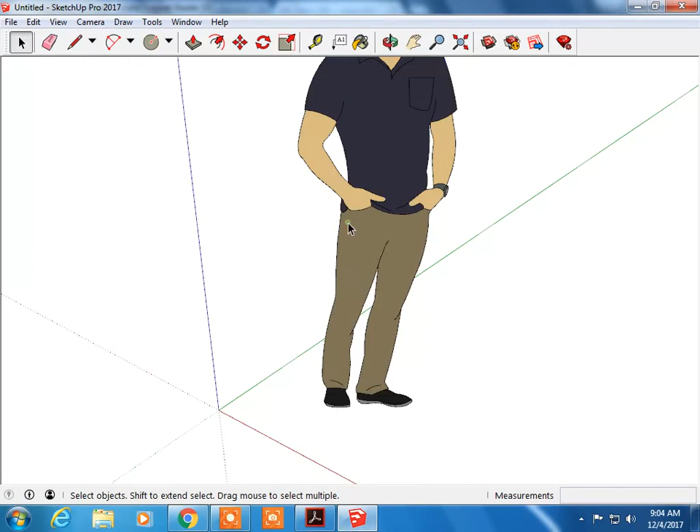So I'm going to delete this person. I'm going to take the rectangle tool and describe a rectangle that's 3.5 by 1.5. I'm going to zoom in on this and check the overall height of the base pad.

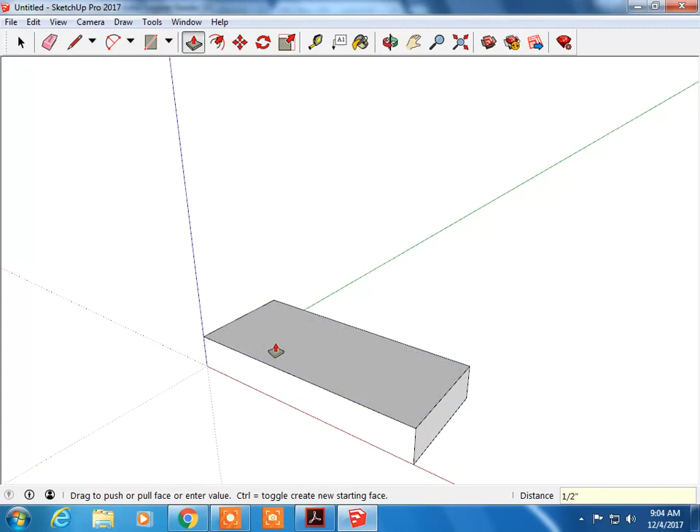The base pad's a 1/2 inch, so I'm going to pull that up 1/2 inch. The tower part of this here is 3 halves, so that's 1.5 inches, and it's 1/2 inch deep.

So getting back to SketchUp, I'm going to take my guideline tool, tape measure tool, and drag this forward 1/2 inch, and then from the left edge over 1.5 inches.

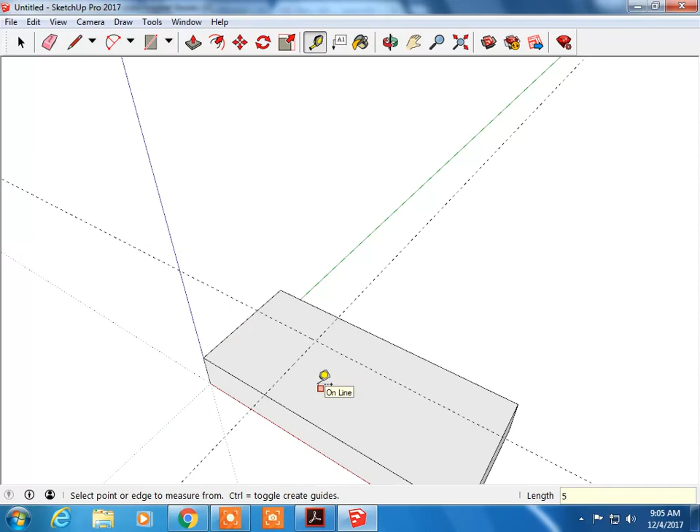Okay, so that's the location where the tower is going to go. That's the footprint of the tower. So I can see there it's 1/2 inch thick to this point right there.

Rectangle tool, going to drag that up 1/2 inch. And now I'm going to flip back to my drawing.

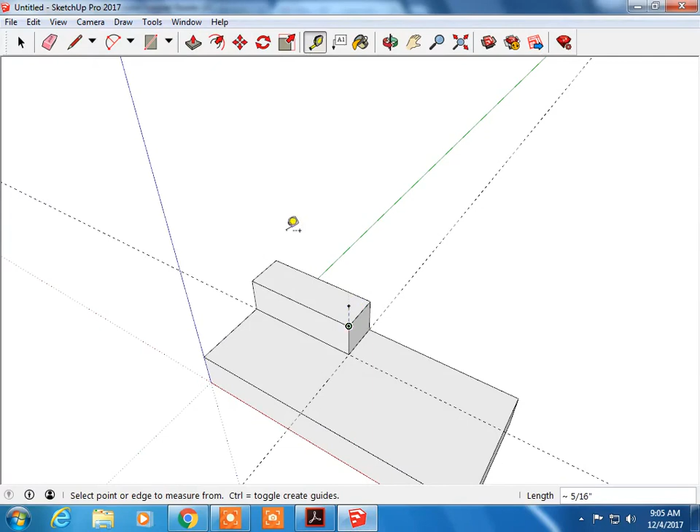Now see this ledge right here, it's 1/2 inch wide and 1/2 inch deep. So what I need to do is create a line right at that point. I'm going to take my guideline tool, the tape measure tool, and drag this over this way 1/2 inch.

I think I'm going to clean up these other guidelines here so I don't get confused. I'm going to divide the face here at this point, and flip back to my drawing, and I can see the total height of the tower here is 3/4 inch. So I'm going to pull this up 3/4.

And flipping back, I can see this ledge right here is 1/2 inch thick. So I'm going to clean up this guideline. I'm going to take the tape measure tool, go down 1/2, and divide the face right here at this point.

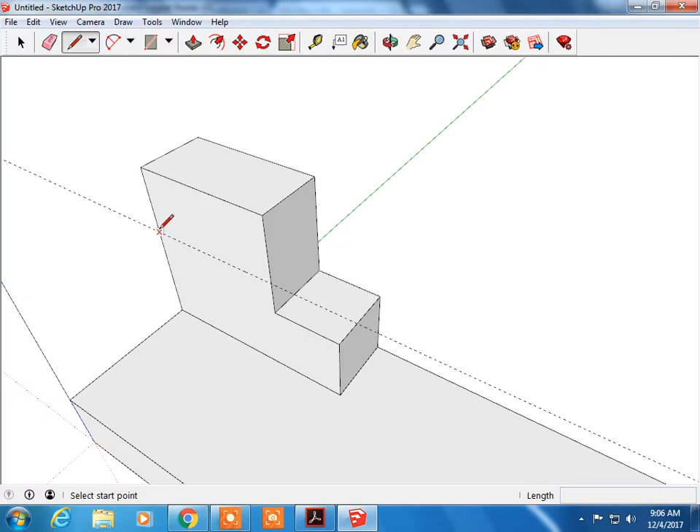And I'm going to pull this outward, like so. Now I'm using the inference tool here to infer that I want this surface here to be right in line with this edge. Alright, so the majority of the object's finished.

Just need to take care of the holes. There's one hole up here and then 2 down in here. So I take a look at my drawing. I see that the hole center is 1/2 inch back, and it's centered on this surface from left to right. So I'm going to go ahead and take this over 1/2 and then up 1/2.

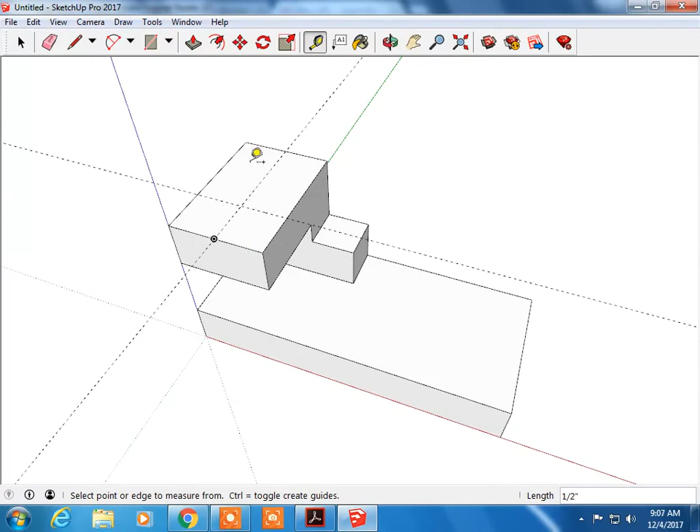Circle tool. And then I'm going to subtract it away with push-pull. Alright, clean up the guidelines.

Now looking back on the other side, I see that the holes are centered here from front to back. This one is 1/2 inch back, and the distance between these two hole centers is 1 inch.

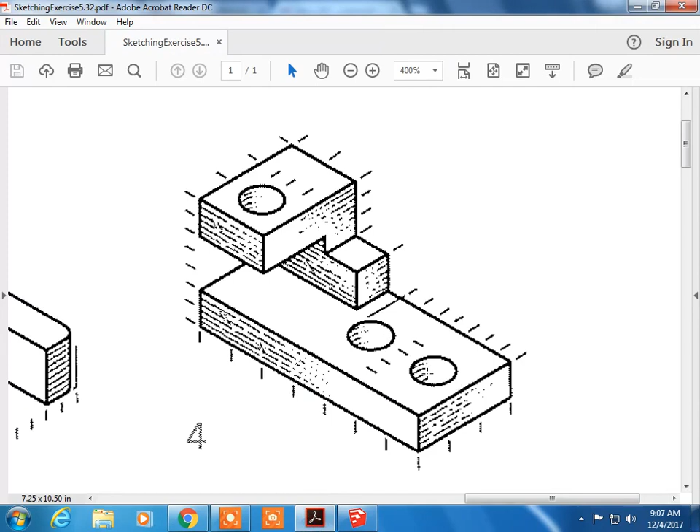So tape measure tool, let's start here with the front edge going back. There's the center point, or the midpoint. It's 1/2 inch back this way, and then another guideline 1 inch.

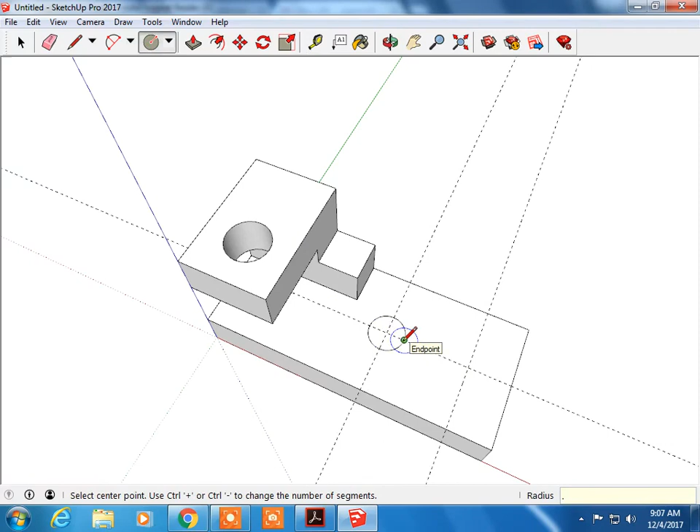And so I'm going to go ahead and put a couple of holes in here, and then subtract them away.

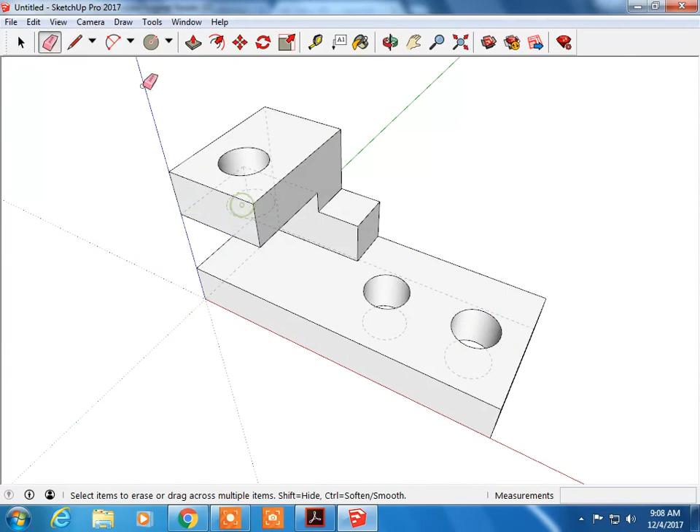Alright, a couple of things to do. I need to view back edges, and I also need to view hidden geometry. And then you're finished. Well, good luck with your model.